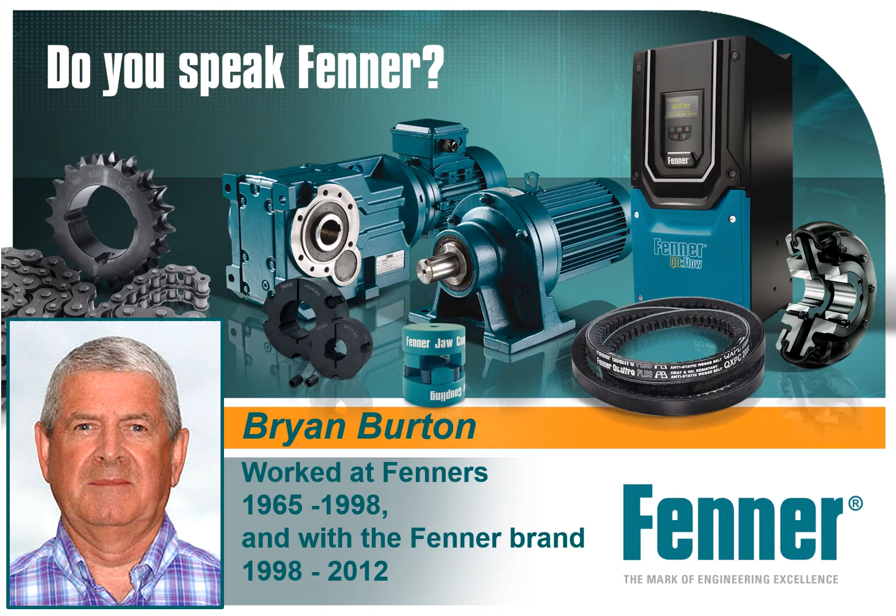Hello, I'm Bryan Burton, and I've spent all of my working life either working for Fenners or working with the Fenner brand. I'd like to show you a somewhat personalised history of the Fenner company.

J.H. Fenner and Company Limited was founded by Joseph Henry I in 1861 in premises on the upper storey of number 21 Chapel Lane in the Old Town area of Kingston upon Hull. The upper storey gave rise to the title of the centenary book published in 1961, 21.5 Chapel Lane.

The business was carried into the 20th century by other members of the Fenner family, including Joseph Henry Fenner II. But Sidney Beetham Hainsworth, having joined the company in 1921, became the leading figure who saw the company go public in 1937, and was elected life president on his retirement in 1974.

The company outgrew the Old Town facilities and built a new factory in the district of Marfleet on the eastern boundary of Hull in the late 19th century.

This factory was destroyed by bombing in May 1941, and wartime production was moved to a subsidiary company at Cleckheaton in West Yorkshire. Rebuilding at Marfleet started in 1947, and on the right is a picture of the factories in 1959, which include a weaving shed, more of which will be mentioned later. Over 1,200 people were employed at this point.

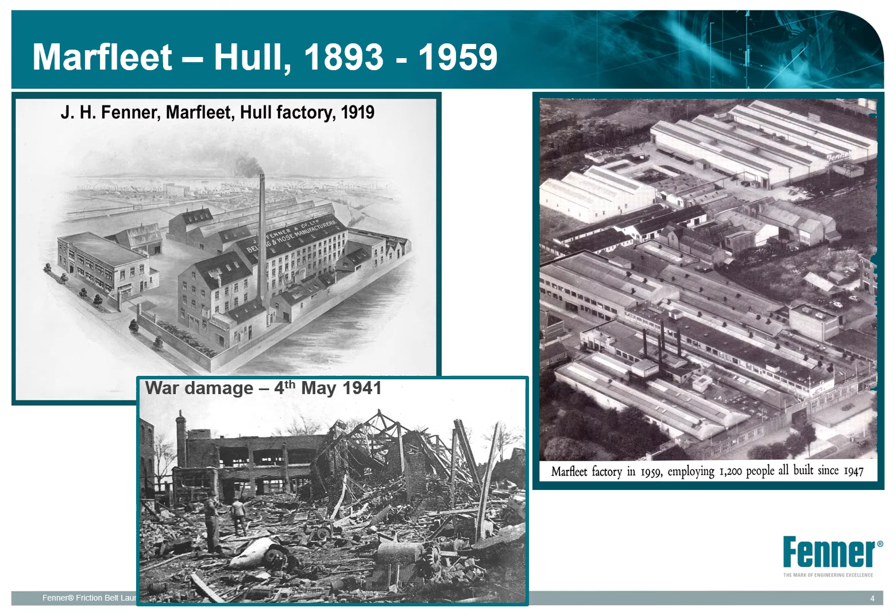The original Fenner products were made of leather for use with horses, that is reins, saddles, etc. But as leather was also being used for industrial transmission belting, this soon became a major product. Drive belting was also made of woven textiles, and this technology was added during the 19th century, along with the means of weaving seamless textile hose, typically for firefighting.

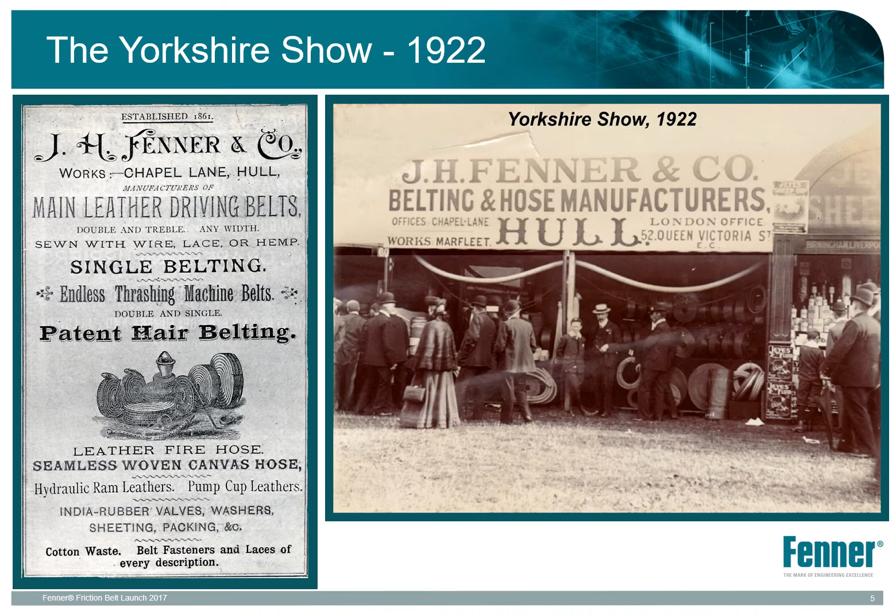These are classic examples of power transmission, connecting a power source such as an engine, electric motor or turbine to machinery that ultimately does some specific work. Modern examples range in scale from computer hard drives, where a miniature electric motor drives a data storage disk via a small belt resembling an elastic band, to huge electric motors or diesel engines driving the crushers that turn quarried rock into the chippings used for road surfaces.

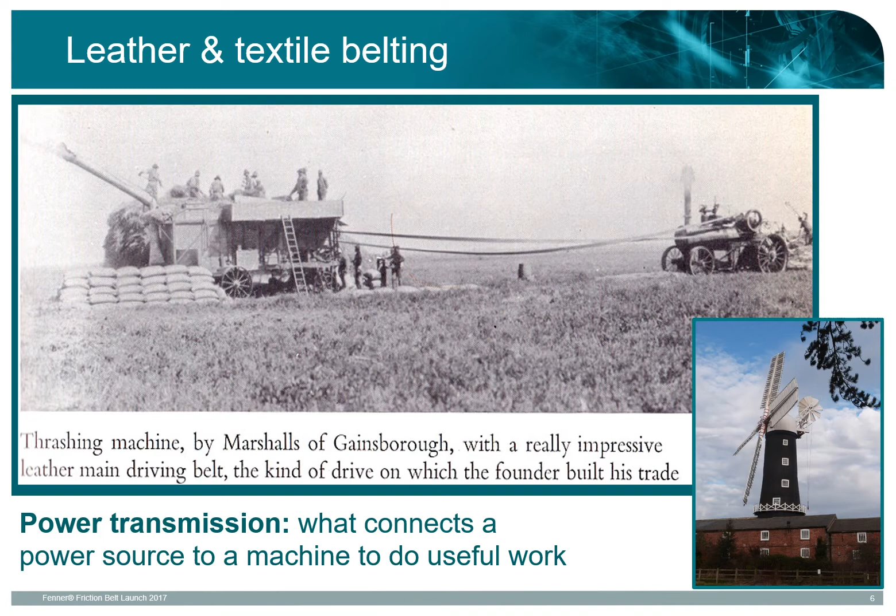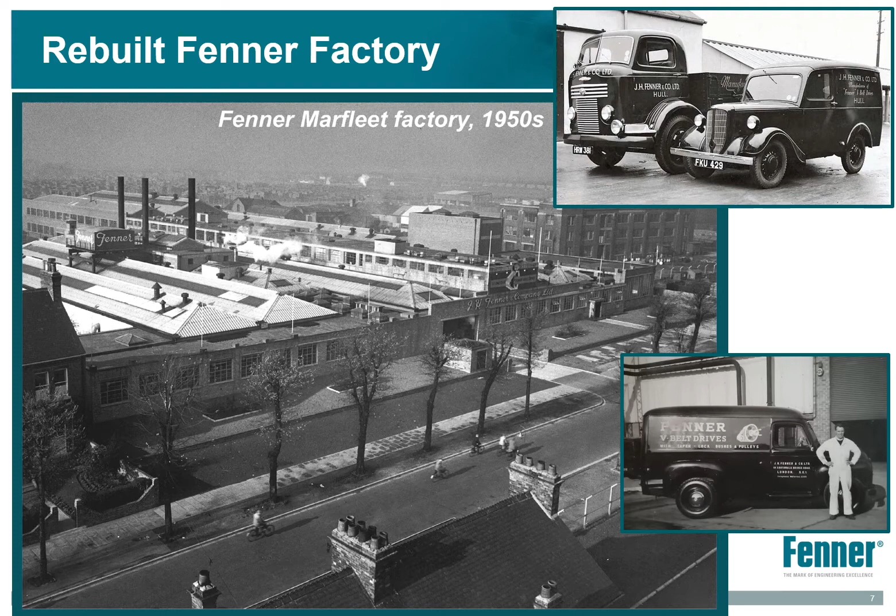India was something of a protected market in those days, so Fenner set up factories to manufacture most of the product range at Madurai in the Tamil Nadu region. I enjoyed a fine welcome there in 2009, with special attention paid to my personal hygiene.

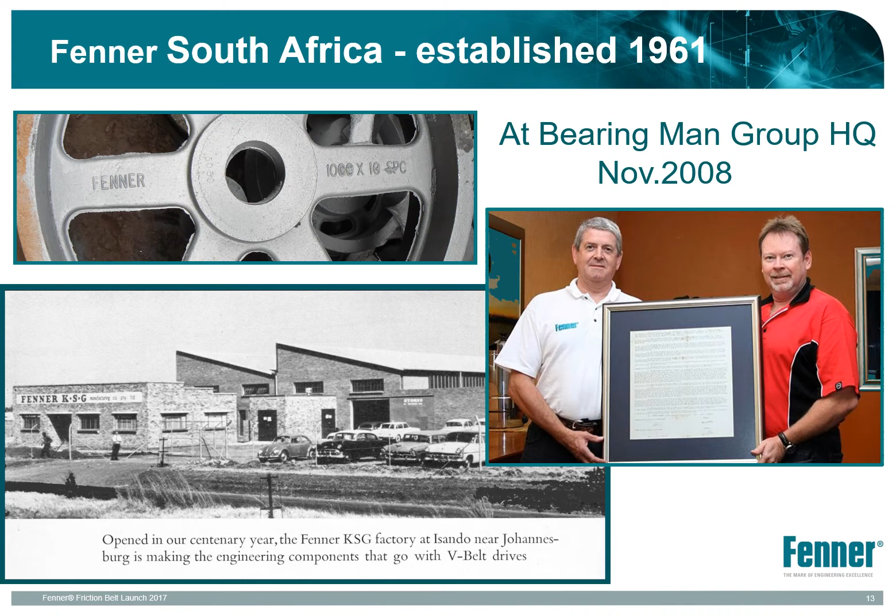In continental Europe, Fenner was centred on a sales and manufacturing complex at Nettetal Breyel in Germany.

I visited many times, but if you went on Carnival Day, then according to custom, if you wore a tie to the office, it would be summarily cut off.

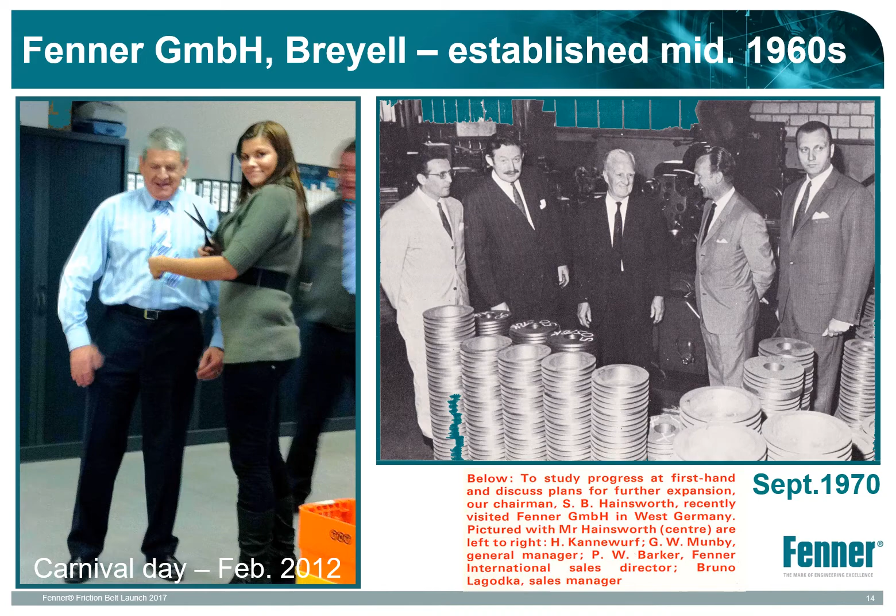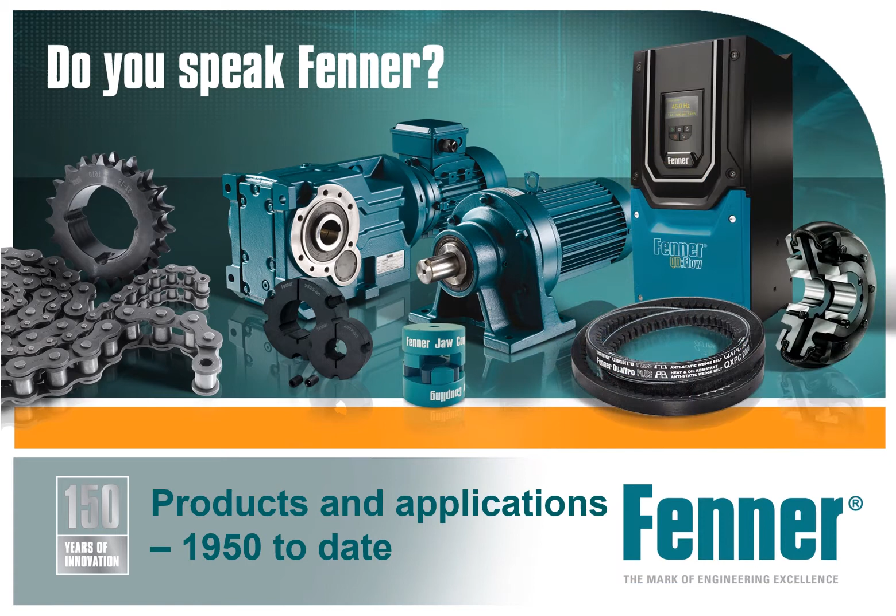Now I'd like to show some of the products that were designed, developed and manufactured by Fenner in the latter half of the 20th century, with a few examples of how they were applied and an accent on the somewhat underappreciated technology that was involved.

During this period, Fenner's was probably best known for V-belt drives, and we were unique in the world for leadership in the technology of both pulleys from metallic materials and V-belts from polymer textile composite materials. Production of both had started just before World War II at Marfleet.

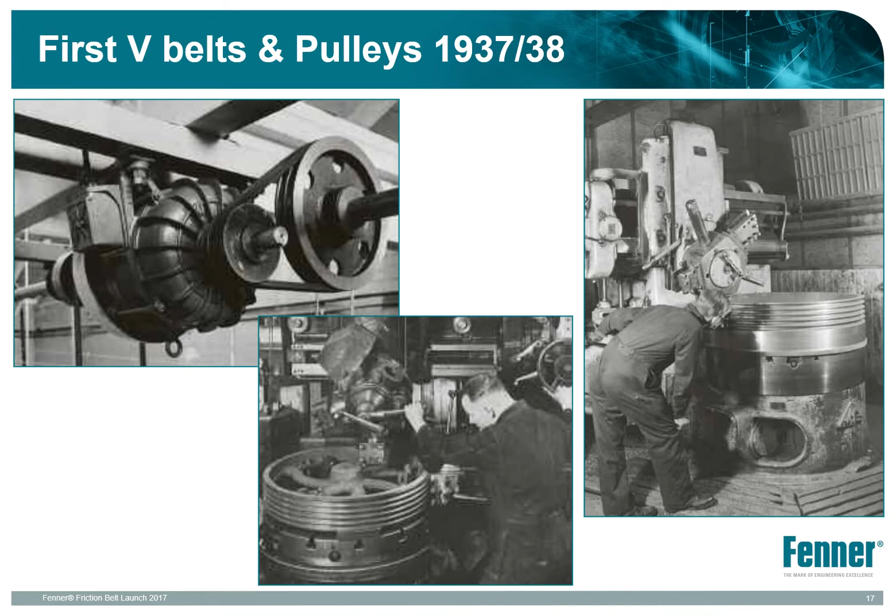Fenner V-belt drives were used to impart spin to the bouncing bombs used in the World War II Dam Busters raid. They were also used to rotate the radar scanners at the Cold War early warning system at Fylingdales in North Yorkshire. The pictures here are from a 1960s copy of the V-Belt Journal.

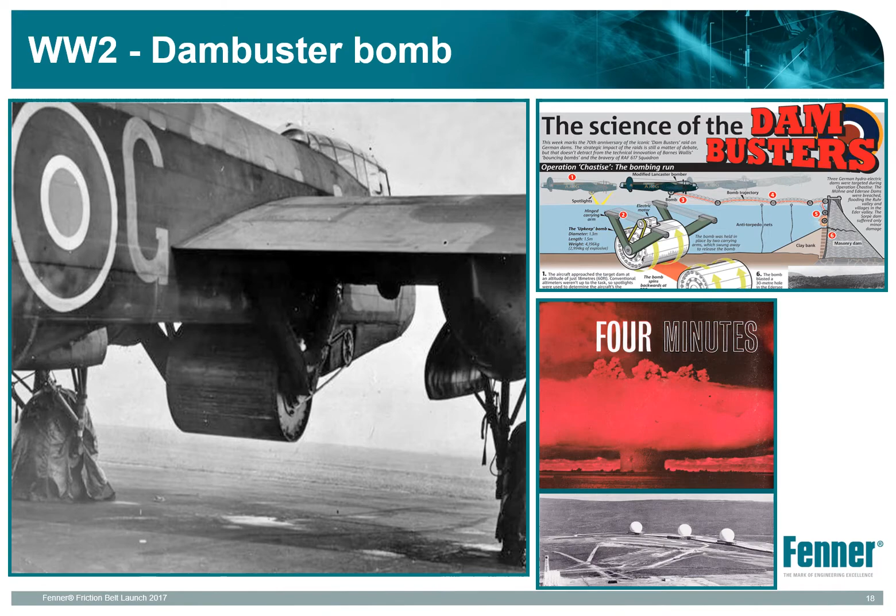Here's a much larger V-belt drive, used as main propulsion in a dredger built in London for a Middle Eastern customer.

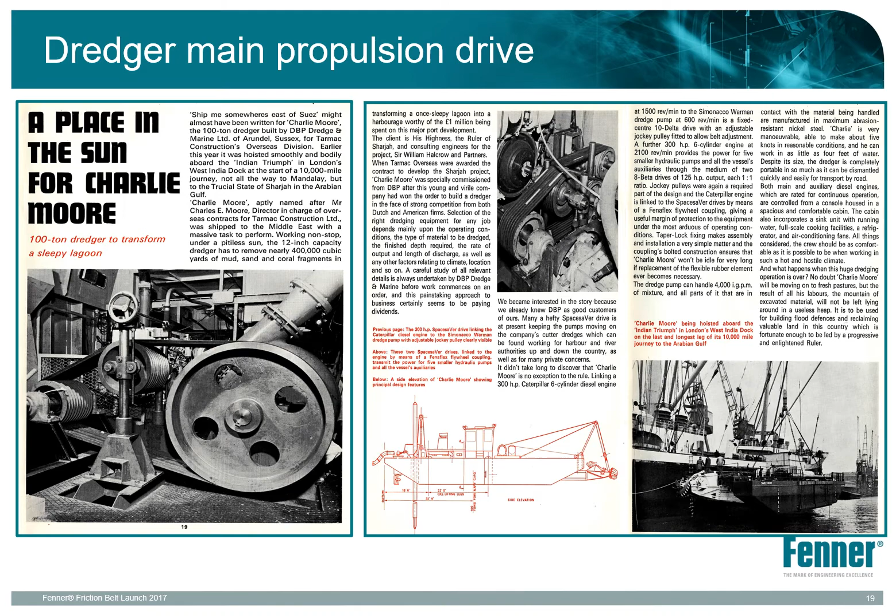This V-Belt Journal article was by Engineering Adviser Jim Mitchell and indicates the considerable technology involved, starting with rubber, string and cast iron and finishing with the ability to transmit megawatt powers in machinery.

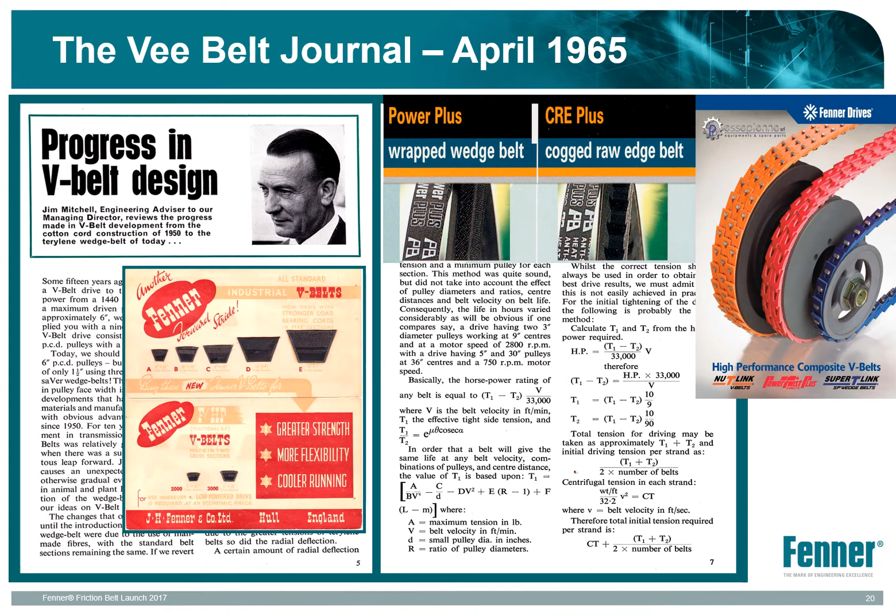One of the Dodge products developed by Fenner was their torque arm speed reducer gearbox shown in the left-hand picture. The right-hand picture shows the latest incarnation, known as the Fenner shaft-mounted speed reducer, dramatically more powerful and efficient than the original. The range of SMSRs was between 200mm and 1.4 meters in height, and application ranged from small conveyors to giant dockside container cranes.

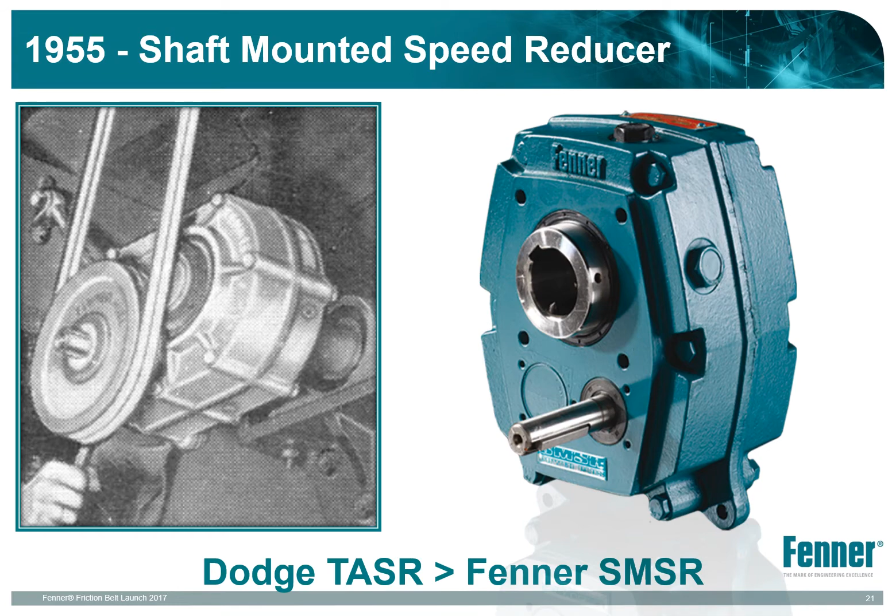Fenner also took the Dodge Paraflex coupling design and improved it considerably to become the Fenaflex coupling. The flexible part of the coupling resembles a car tyre, which demonstrates again the Fenner expertise of making effective products with both metallic and polymer textile components.

Such components need fixing to machine shafts, and here the hugely successful Fenner Taper-Lock bush was evolved from an original Dodge design invented by a Yorkshireman while working for Dodge in the immediate post-World War II years.

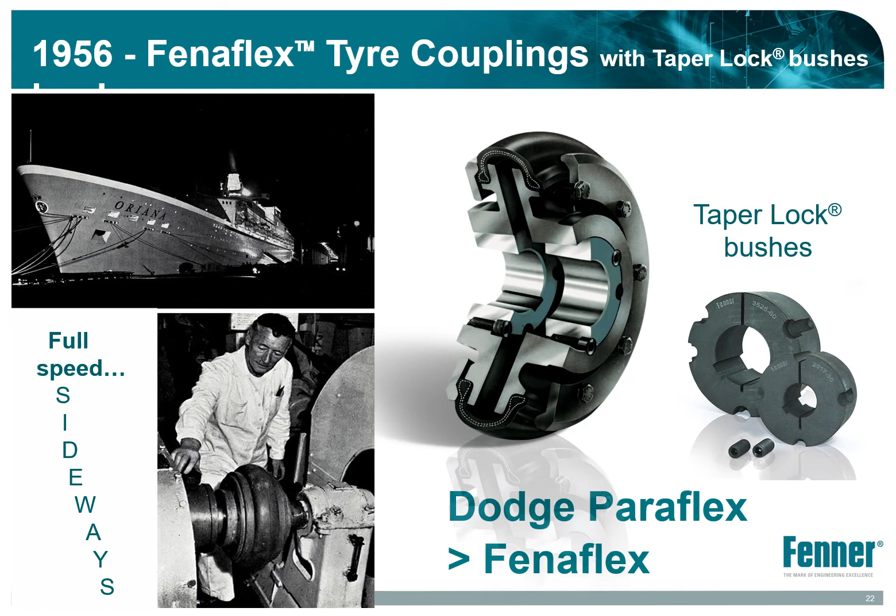Ocean liner hulls are by no means totally rigid, so a flexible coupling like Fenaflex was the ideal medium for connecting side thrust propellers to their drive motors in the P&O liner Oriana, overcoming any misalignment caused by hull flexure and enabling the vessel to maneuver sideways without the need for tugs.

A prestigious new research centre was opened in 1961 to coincide with the centenary of the founding of the Fenner Company. It was called the Hainsworth Research Centre and was known as the HRC. I spent much of the 70s working there as a senior development engineer.

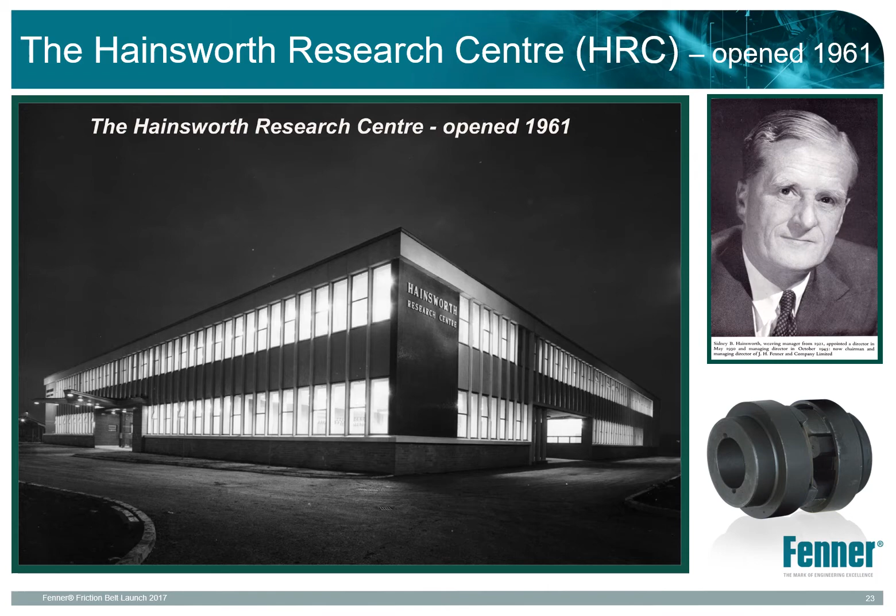The HRC name was given to a new shaft coupling developed there in the 1970s. This was once again a flexible coupling and used both metal and polymeric components.

On the left is my Lifetime Achievement Trophy, presented to me on retirement on the last day of February in 2012, which just happened to be a leap year, so I had to work an extra day.

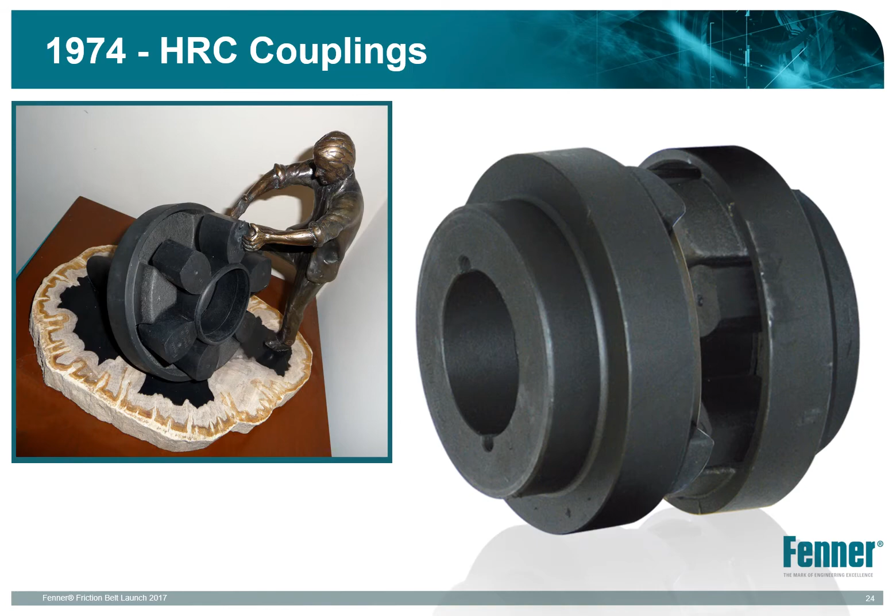Here's a spread from the March 1964 V-Belt Journal showing engine mounts and rubber bumper inserts on the then new MGB sports car. The components were made in the mechanical rubber products division of the Marfleet factory, known locally as MRP.

The photos show the products being examined at the MG car factory by Sir Leonard Hutton, the famous cricketer, who was a director of Fenner at the time.

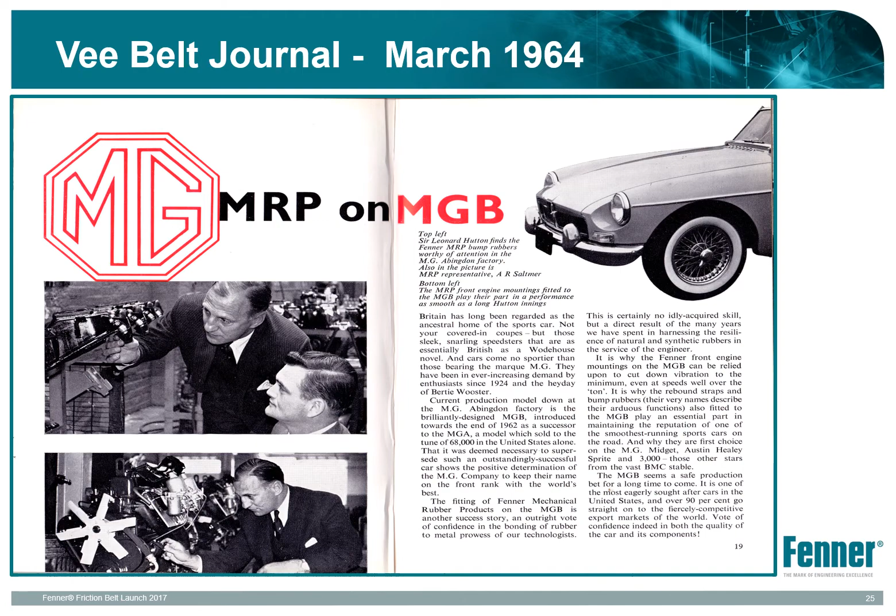Bostock and Bramley, based in Stalybridge near Manchester, became the large gear division of Fenner in the late 1960s. This picture shows a marine propulsion gear unit.

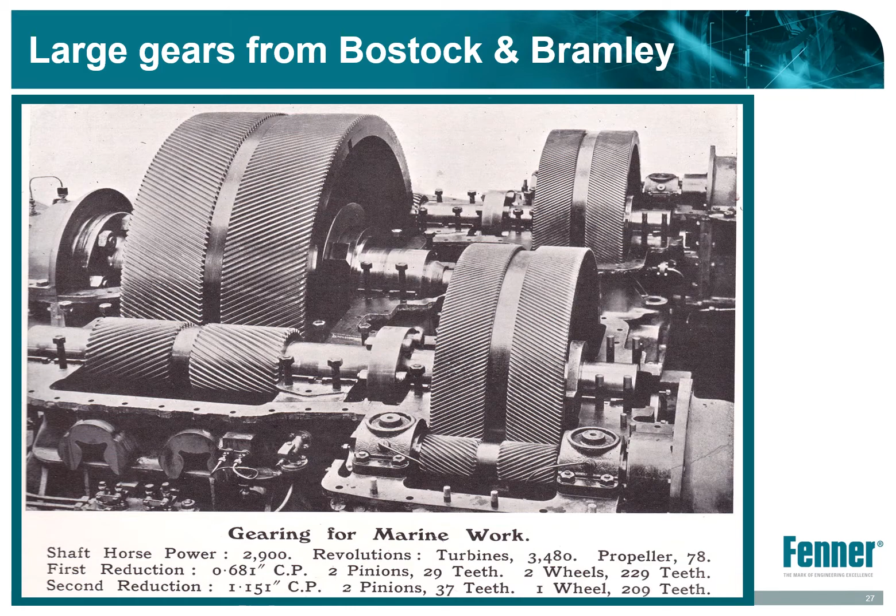Engineering Adviser Jim Mitchell designed a range of worm gear speed reduction gearboxes in the early 1960s. This was a popular style of gearing where high reduction ratios were required in, for example, heavy process machinery. The Hainsworth design was unique at the time for its casing design, allowing it to be easily mounted within machinery in any of a dozen different configurations. The words bottom right indicate the level of technology inherent in such gears, at which Fenner excelled.

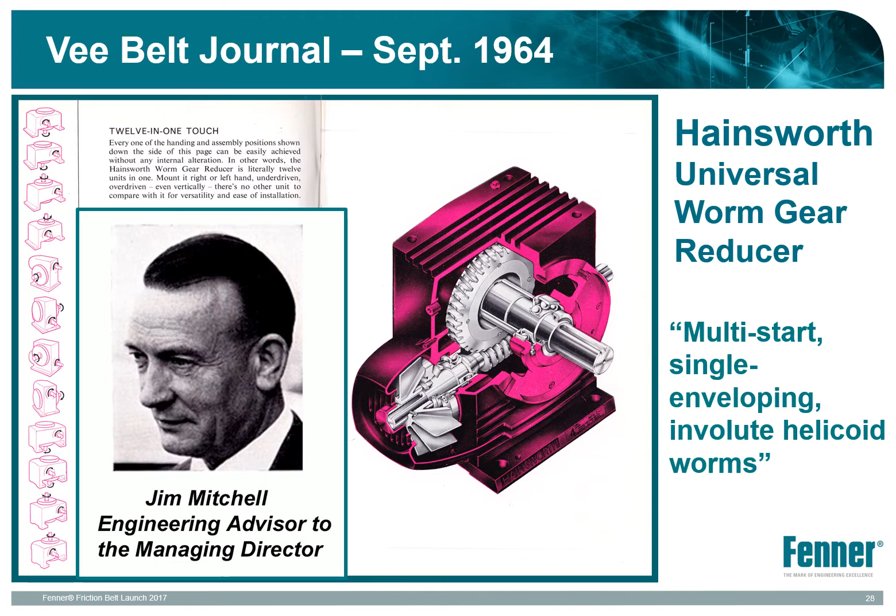Process machinery often needs to work at different speeds. As electric motors tend to rotate at a fixed speed related to the frequency of AC current supply, one old way of varying machine speed was by using variable diameter pulleys, as illustrated in the blue graphic, and Fenner made a range of industrial variable speed belt drive systems. However, the advent of modern electronics enabled Fenner to develop their range of Speedranger controls for electric motors. The words bottom right summarise the technology and again illustrate where Fenner were leaders in the 1960s and 70s.

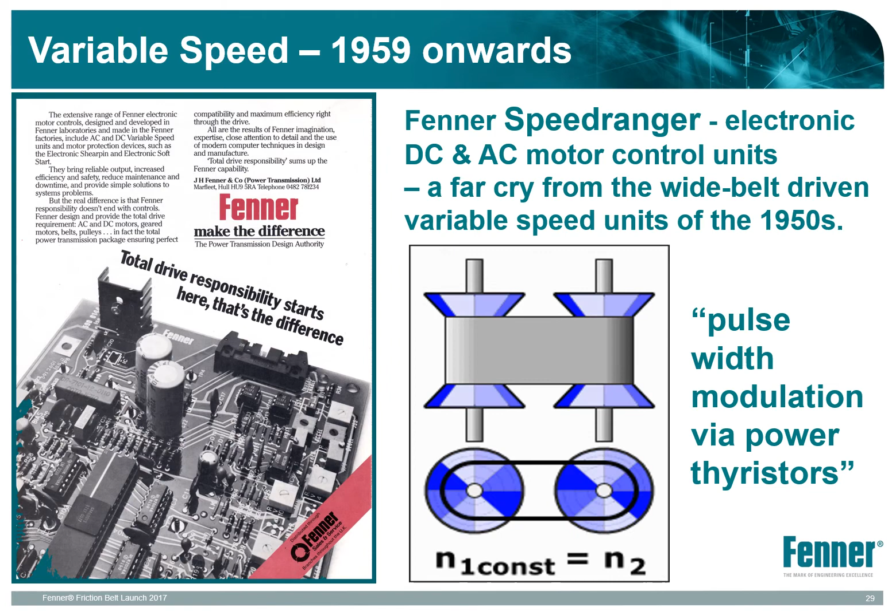Here's something a little different from power transmission. In 1956, Fenner acquired manufacture and marketing rights for the Rapistan range of materials handling conveyors from the US company Rapids-Standard Corporation. The manufacturer's equipment company, known locally as MEC, was set up in brand new premises in Hull to make these conveyors, typically for warehousing and airport baggage handling applications.

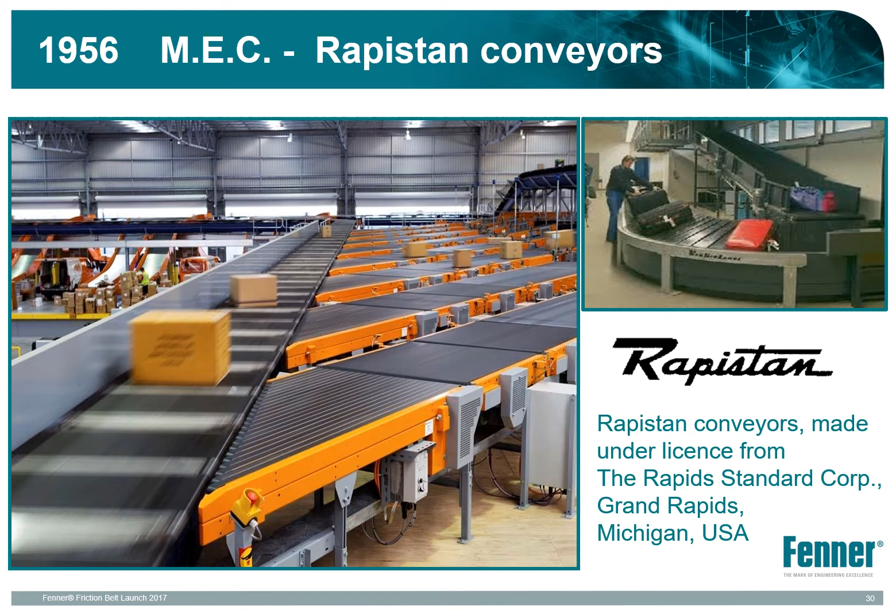And here is a diversification of great future significance. In the early post-war years, Fenner upscaled their expertise in woven textile belting to create heavy-duty conveyor belting for mining and quarrying industries. A disastrous accident at Creswell Colliery in Derbyshire in 1950 cost many lives due to a conveyor belt catching fire and literally conveying the fire down the full length of an underground coal seam.

Fenner worked with the National Coal Board to develop a new kind of conveyor belting that had effective fire-retarding properties, as well as being anti-static to avoid frictional static electricity igniting explosive gases that can occur in coal mines. In 1952, Fenaplast was born. The carcass of the belting was solid woven rather than laminated. It was produced initially in the weaving shed at Marfleet, mentioned earlier.

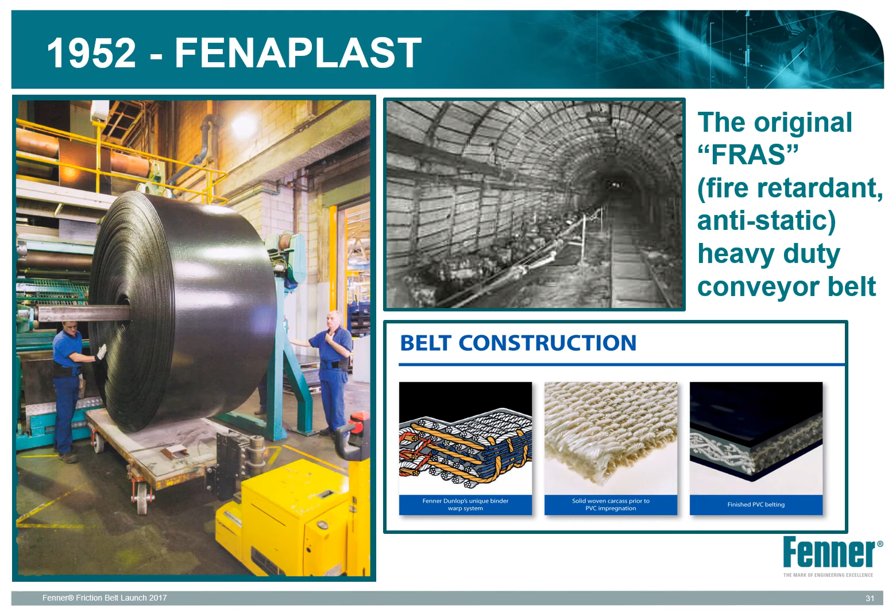Back to the company itself. 1974 saw the structure reorganised on a divisional basis, the main divisions being power transmission, conveyor belting, known as Fenaplast, fluid sealing, comprising the Pioneer Weston Seal Company, but enlarged by further global acquisitions in the 2000s. The material handling division, which was the MEC company, and the international division, taking in all of the overseas manufacturing and sales operations. Peter Barker was Group Chief Executive.

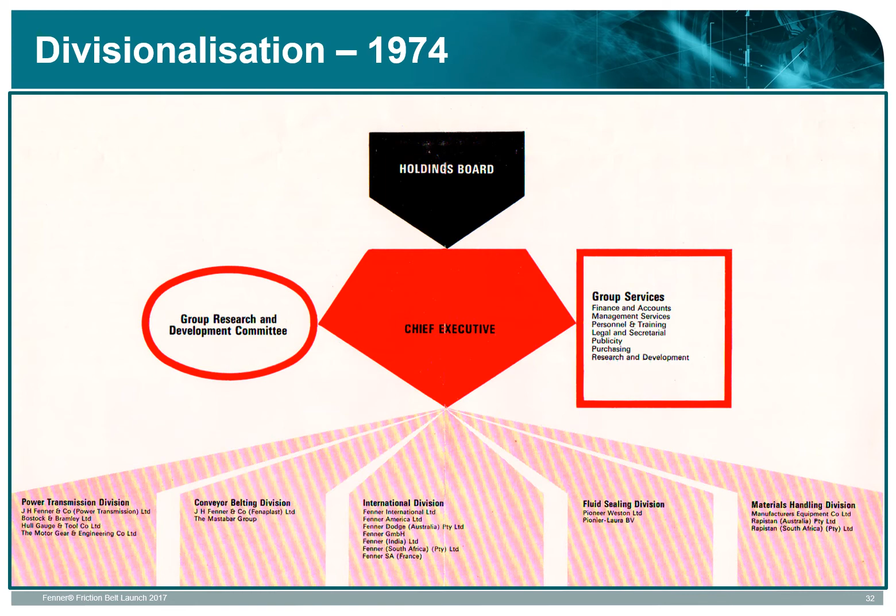Here we summarise developments during the last 3 decades of the 20th century, culminating in 2 fundamental changes. Firstly, the power transmission division was disposed of in 1998, and the Fenner brand name for power transmission products was sub-licensed to a new company called FPT, like Fenner Power Transmission, but without using Fenner as part of the company name. This was based in Blackburn at the old Fenner Sales and Services premises for the marketing and sale of Fenner brand power transmission products.

In 2002, FPT was merged with a major UK competitor called Wyko, based in the West Midlands. In 2006, the bank who had funded both FPT and Wyko brokered the sale of Wyko to a Dutch private venture capital company called Eriks. I followed the Fenner brand through these developments and retired from the Eriks company in 2012.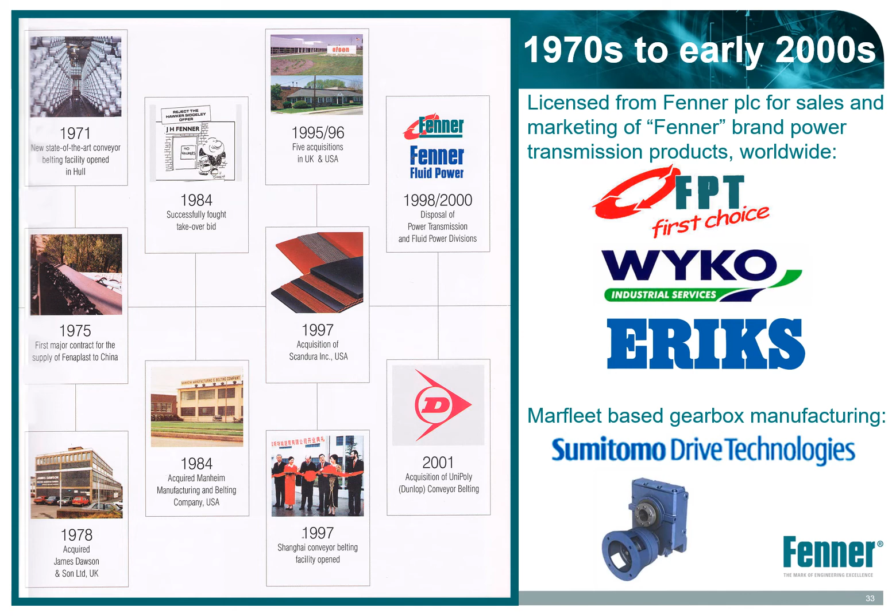Meanwhile, the Marfleet-based shaft-mounted speed reducer manufacturing facility was sold by Fenner plc to the Japanese company Sumitomo Drive Technologies, who retained premises on the Sutton Fields industrial estate in Hull.

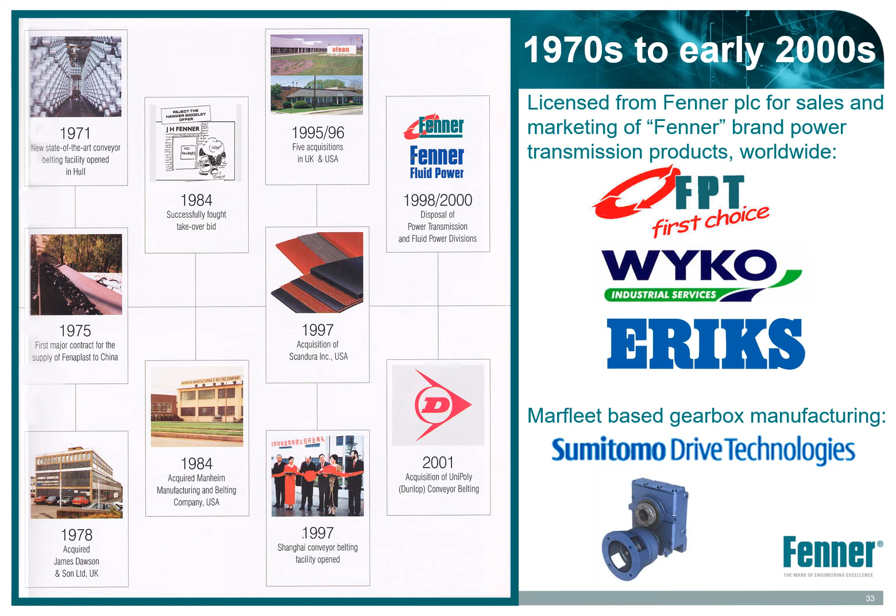Secondly, developments shown on this slide include new Fenaplast factories in Hull, Scotland, India and China, and the acquisition of two major competitors in the heavy conveyor belting business, Scandura from the USA and Unipoly, who were a European Dunlop company. This established Fenner as the undisputed world leader in heavy conveyor belting. There were also other high polymer technology acquisitions during this period.

After the Fenner company itself, my work involved the sourcing, marketing and technical support for Fenner brand power transmission products worldwide. This is a graphic from a marketing campaign we deployed at Eriks.

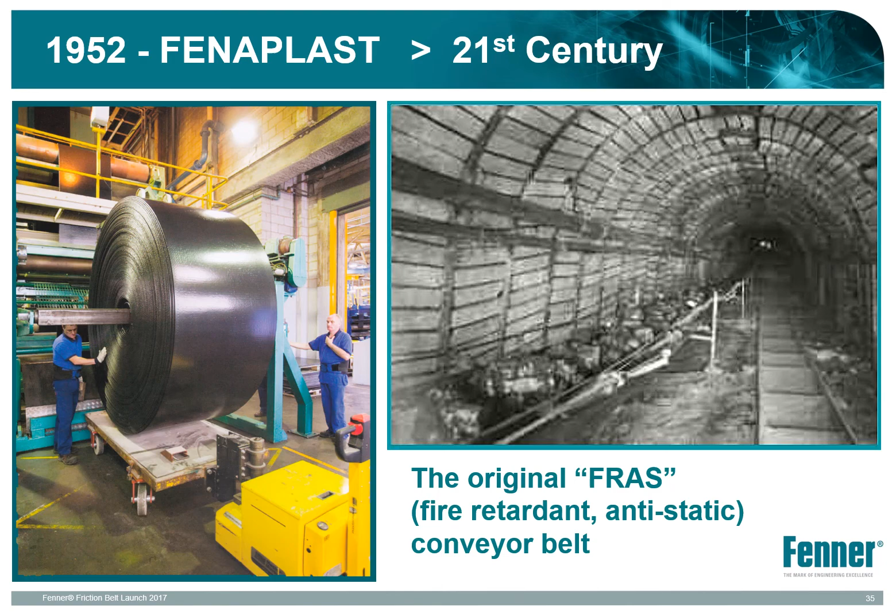Meanwhile, the Fenaplast division had become the world leader in heavy-duty conveyor belting for mining and quarrying industries. This summary of Fenner plc from 2004 to 2010 shows how further acquisitions reinforced the Fenaplast division and worked towards creation of an advanced engineered polymer products division with a significant presence in the medical equipment market.

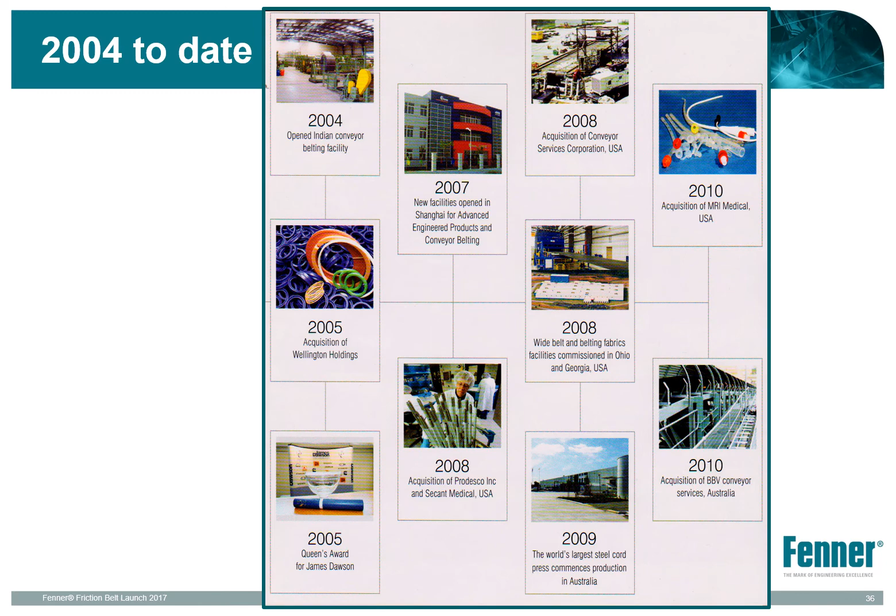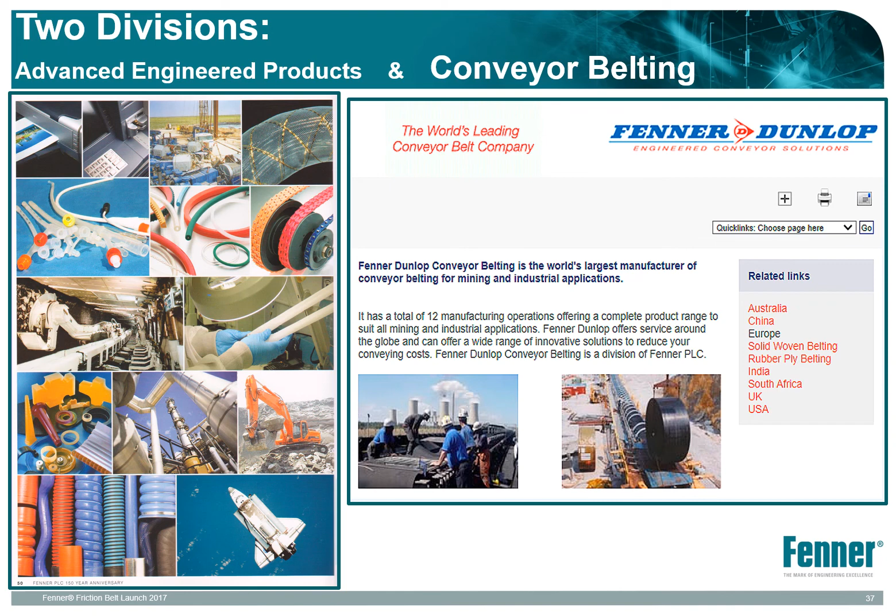Hence, Fenner plc became a two-division company in the 2010s, Fenner Dunlop Conveyor Belting and Advanced Engineered Products. Then in 2018, Fenner became part of the Michelin group of companies and the company became known as Fenner Group Holdings Limited. Company headquarters are still based at Hesslewood, just outside of Hull, and there is still a major Fenaplast factory at Marfleet.

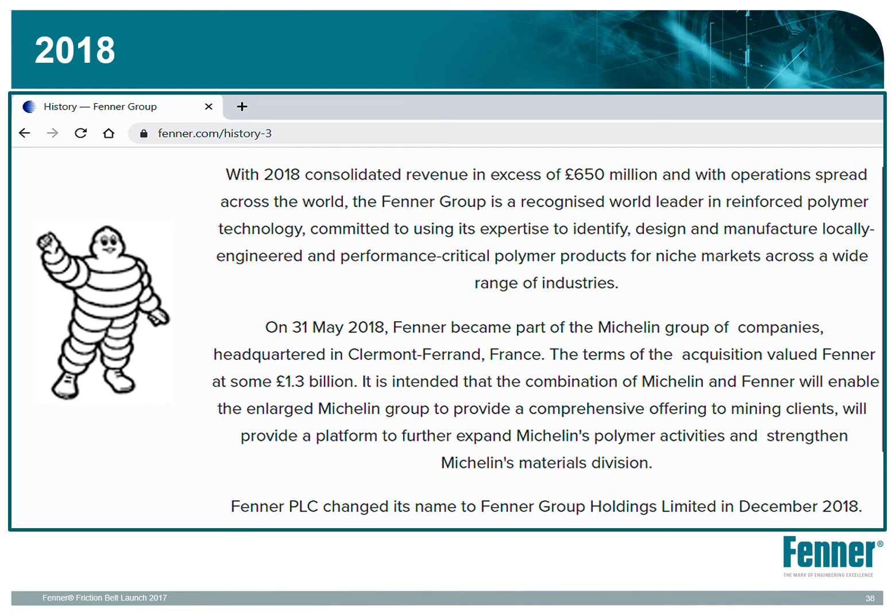Now, to anyone suggesting that a 47-year working life involving the same company name was a bit boring and stick in the mud, I must say that I enjoyed pretty much all of it, and it had some significant highlights.

But finally, after retirement, my wife and I went on a cruise around the Caribbean, docked at St. John's in Antigua and set off to find a refreshing drink. My wife found the bar, but on the way we passed a piece of street art, an old sugarcane crushing machine set up on the corner of the main street, sporting a Fenner Hull pulley, which goes to show there's just no getting away from it.